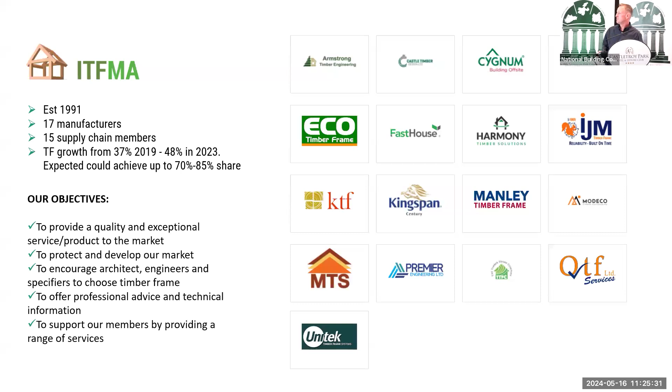As the trade association, we work with the likes of NSAI in developing the standards and continuously improving Irish Standard 440. We work with the Department of Housing, generating technical guidance documents. We have our own Part B supplementary guidance document for fire, and we're currently developing a second one for 1 hour assemblies that'll get us into more use in apartments and duplexes, etc. That'll come out later this year.

We're carrying out fire testing as we speak, and we're also developing a timber frame erector scheme, where we have around 280 erectors registered now, and they actually have to carry out examination online to be approved. It's still very much in the development stages, and we're trying to see how we can enforce it at the moment. That's where the struggle is.

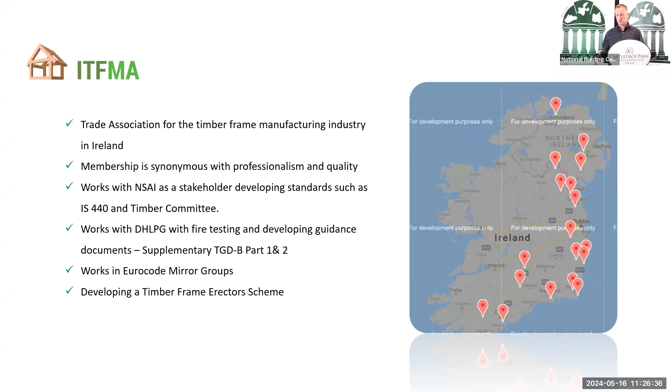So why is timber frame increasing in popularity? It's the same benefits as any offsite construction. Really, we are selling reduced build times, a much faster build, so reduced prelims. Overall program costs are down. You get more predictability in your program, in your costs, and then very importantly, reduced labour on site with shortages of skilled labour.

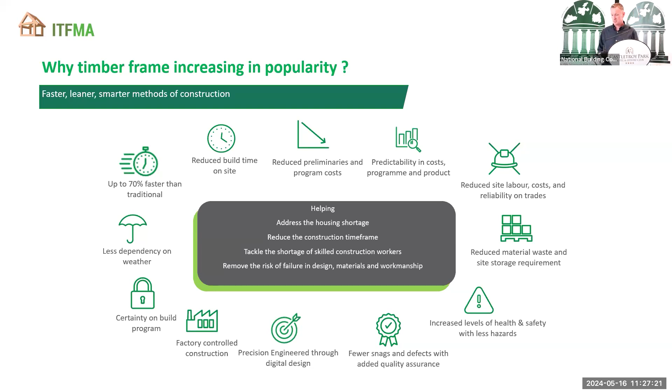More and more off-site construction has been used. It's precision engineered in a factory controlled environment, so we're less dependent on weather. We're starting the construction process in a factory while site work is getting started, and that's where the speed comes in.

I know I'm here to talk about IS 440, but I take every opportunity to mention that timber is the most sustainable way to be building. We have to talk about carbon capture and storage, because we have government targets now that we're trying to meet. So just a brief overview.

Forests and trees capture carbon from the atmosphere, producing oxygen through photosynthesis. Every 60 to 80 years, we harvest those trees, and then sustainably manage the forest, so we're actually growing more than we harvest. You're creating a new carbon sink every time you're planting new trees, which are fast growing, so we're absorbing more carbon dioxide. When we cut these trees down, 50% of the dry weight of that timber is still carbon, and that carbon is stored in it for the life of the timber.

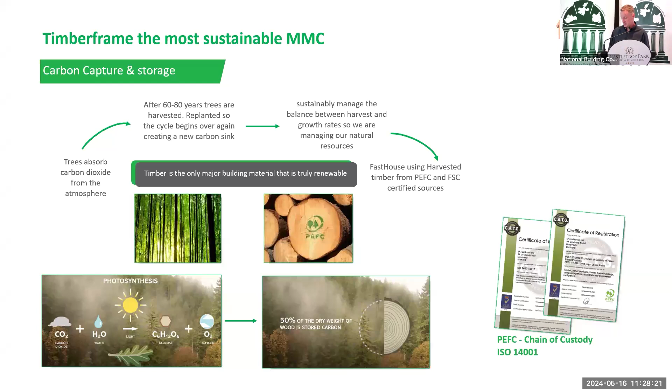If we put the timber into buildings that can last another 100 years or so, you're storing the carbon for the life of the building. So that's the real idea behind it.

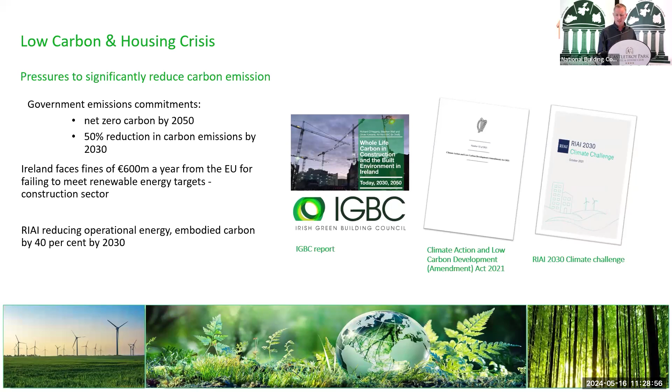As it stands, we are trying to get net zero by 2050, reducing carbon emissions by 50% by 2030. But if we look at the actual government targets to build 400,000 houses by 2030, the Irish Green Building Council's research has shown we're going to increase our emissions by 5 times, not reduce them. So we'll probably continue to fail on these energy targets. We're purely looking at operational carbon, but embodied carbon is the next stage to look at, and that's where timber comes in.

So I'll move on to timber systems. There are various types. You see modular, which we call 3D volumetric in the industry. You've panelized, which is a post and beam construction, 2D. CLT would come under that, and then you've panelized 2D, which is a platform type construction, which is your traditional timber frame that we're talking about.

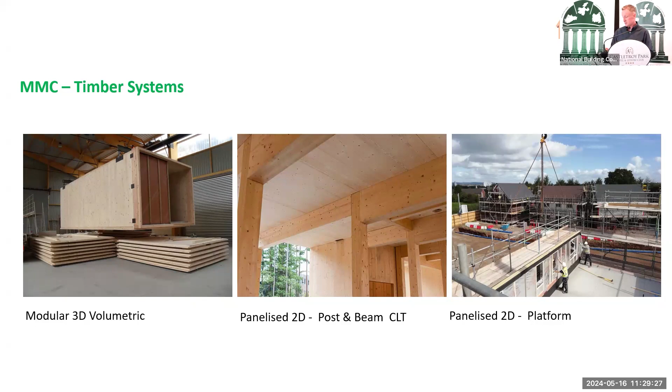So it's not a modern method of construction, everyone throws it in the same category, but it's been around a long time, although it has developed. It had a lot of problems in the early days. We've been building timber frames since after the war era. In the 50s, timber frame started to get built, then we moved on to the 70s, where there was a boom and a new generation of timber frame being built. It has developed quite a lot over time.

There's still evidence of houses built from the war era still standing, so it's definitely not a modern method of construction.

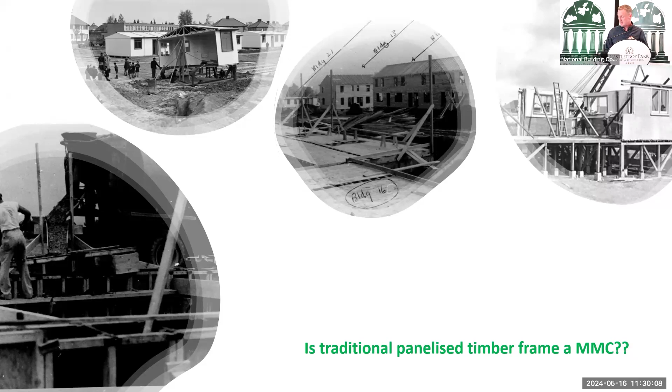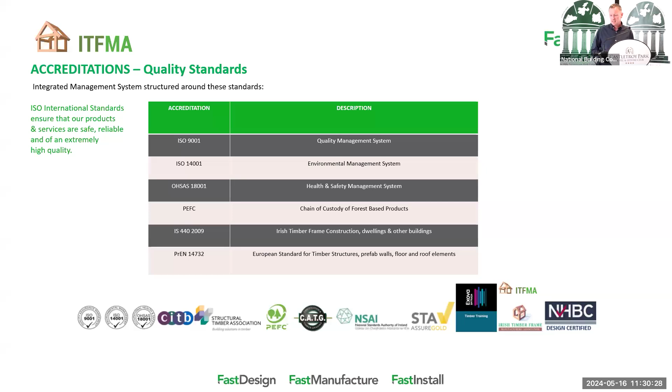There's various quality standards. I just threw up what Fasthouse have, but the ISO international standards, if you have an integrated management system based on those, you're ticking a lot of the boxes for quality management, environmental management systems, health and safety, etc. The key one we're here to talk about today is the Irish standard IS 440.

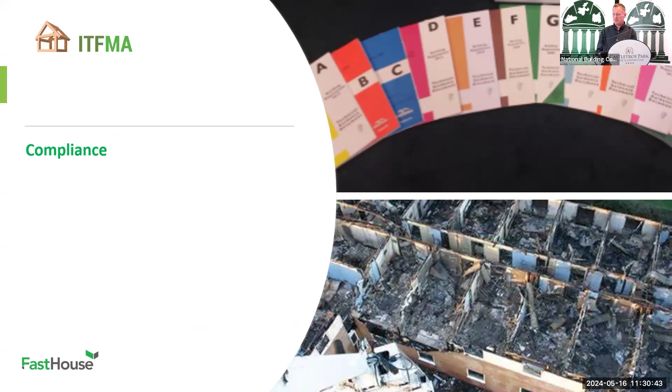So any modern method of construction, you're trying to show compliance to legislation, trying to prove that you can comply with the 12 parts of our building regulations. One of the easiest ways of doing that, you can either use prima facie guidance to give sufficient evidence by following the technical guidance document, or you can have your own national technical specification standard, which timber frame has. A lot of the other modern methods of construction are trying to show alternative methods of compliance.

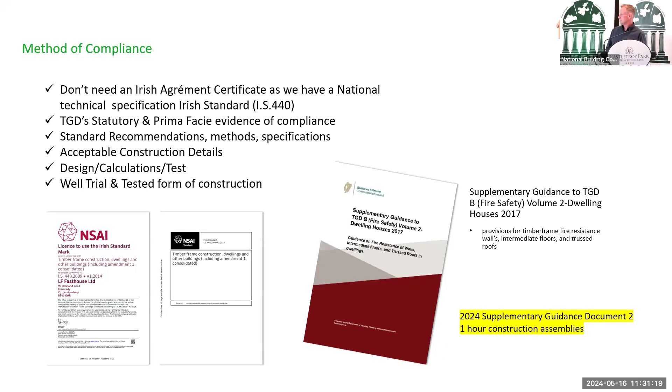We basically have all the accepted construction details. It's fully tested, a well trialled and tested form of construction. As I mentioned, we have a supplementary guidance document for fire, and we have another one coming out for one hour construction. So it's quite a bit advanced.

One thing worth noting is it's not just dwellings, it does cover other buildings, and it covers on-site and off-site. If you're following IS 440, you could effectively build a timber frame on-site. If you're not following IS 440, or cannot demonstrate that you're following IS 440 and have an NSAI certificate, then you're into an alternative approach.

The 2024 amendment is worth mentioning. We have that coming out later in the year, which is probably looking more at different wall build-ups being introduced, different external cladding options. So it's just developing it that bit further.

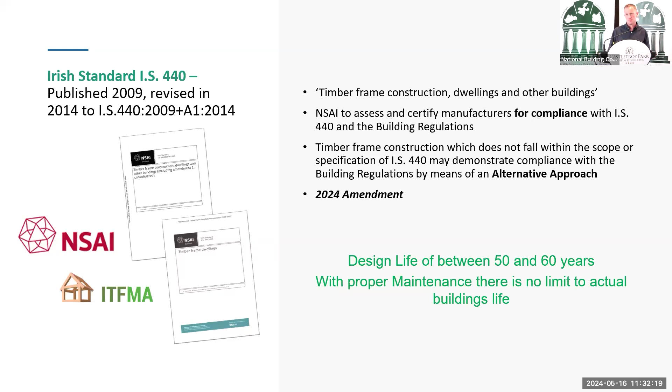As I mentioned, design life is 50 to 60 years, but with proper maintenance there's no limit on an actual building. If you maintain the cladding on the outside, timber frame can last indefinitely.

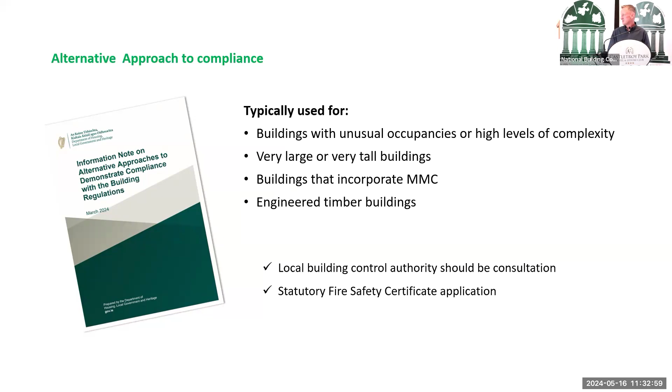So failing to have a national standard, the alternative approach method then - a good document released in March 2024 explains it quite well. Basically, if you don't have sufficient evidence, you're not following the technical guidance document, you're falling outside it, so then you have to use alternative methods. If you're going down that route, you need to contact local building control very early on in the consultation process, and your fire cert application and stuff needs to go in very early, so there's a bit more involved in it.

There's what they call alternative standards - you can use other approvals from other jurisdictions. There's a bit of confusion around this. We've found, especially when it comes to external claddings, confusion over what we can and can't use. I suppose the confusion is people look at Technical Guidance Document D, look at the harmonised standards and European technical assessments, and say, well, hold on, it clearly states you can have an Irish standard, an Irish agrément cert, or

an alternative national approval specification, or any state which is part of the European Economic Area. So the harmonised conditions are for marketing construction products. However, each member state has its own national legislation you still have to comply with. So you could have a German standard, say, for a building system, but you still then have to go through the 12 parts and prove compliance. You just can't come up with an ETA and say, well, this is fit for purpose in Ireland. So that's where a bit of confusion is.

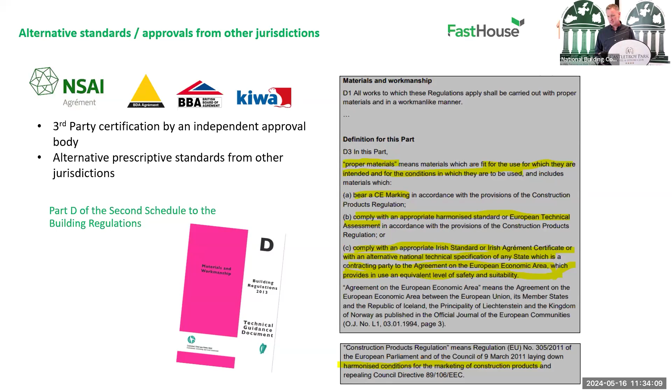So I suppose where we're going with this is you can have the NSAI Irish standard that shows you have complied with the 12 parts of the Irish regulations. What others are doing now is they're getting an alternative third party to do a verification process, and it'll mention in the certification that they have actually assessed it to demonstrate compliance with the building standards here in Ireland. My understanding is once you have this within your agrément cert, it should be fit for purpose.

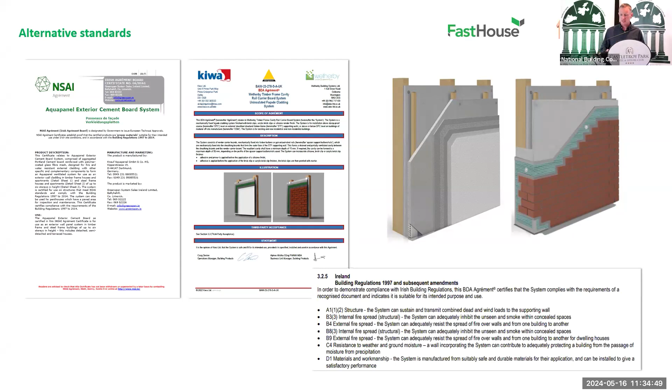So just to give an idea, but I suppose we don't have to worry about alternative approaches - timber frame in Ireland is covered under an Irish standard. The scope of the standard: 4 stories, maximum height of 10 metres to top floor, maximum fire resistance 60 minutes.

Key is a drained and ventilated cavity. That's not limiting us to any particular exterior cladding - some people believe it only covers masonry outer leaf. Once we maintain a ventilated cavity, you could effectively put anything on the outside once it carries its own approval or own certification.

So it's excluded from the scope of IS 440 what you actually clad the outside of your building with. Roof coverings, external envelope on the outside is not covered within the standard. Once you have a drained ventilated cavity, you could effectively put anything on it.

So it covers panels manufactured using mechanical fasteners. That's key, so you can't basically use a SIPS panel. You can't bond timber to an insulation core. You couldn't have cross-laminated timber where you have different lamellas cross-bonded. It's actually mechanically fixed, so it's your typical stud wall type construction, maximum stud center 610 mil, and it does include the interfaces with the external envelope.

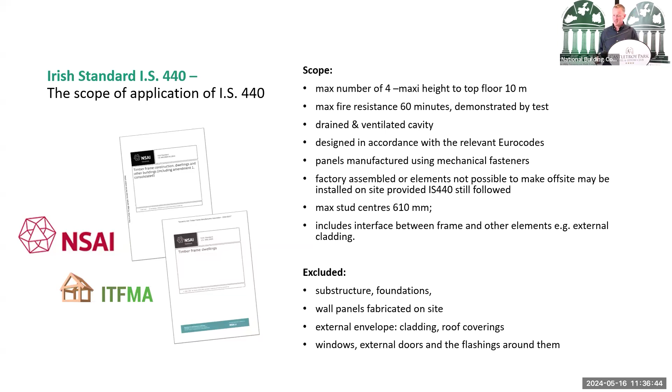So it doesn't include the actual whatever you put on the outside, but we do have to cover the interfaces with the timber frame. Excluded from IS 440: substructures, foundations, your wall panels fabricated on site. Well, you can fabricate, if you're fabricating to the IS 440, you could stick build a house on site in theory, but it's not going to be done in this day and age.

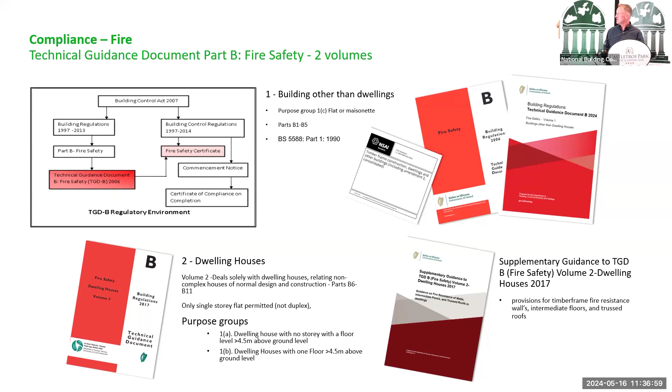So I just adapted a fire presentation I'd done previously, so I will not go into depth in this. It goes on and on. I'll fly through quickly - it's more to demonstrate the level of detailing that the timber frame industry in Ireland has.

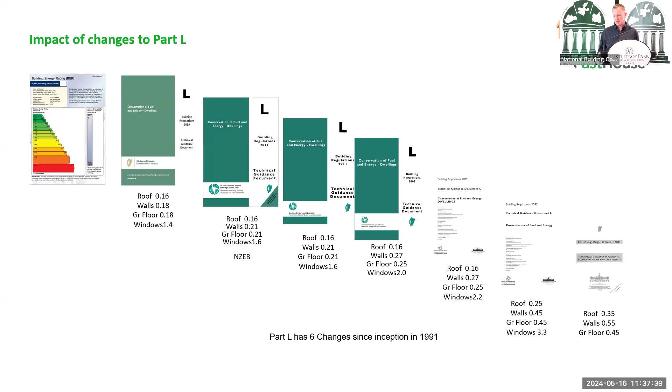I suppose what's happened is the impact changes of Part L. As Part L starts bringing down - if you look at walls from 1991, 0.55 U values, and we're down to 0.18 - what's happening is we were trying to make more energy efficient buildings all the time. We were encouraged to put more and more insulation into the walls, and as a result that became more and more plastic foam materials going in, and effectively we were just worried about heat loss. And also then you have to look at what impact does that have on fire and other details. So that's what brought about the supplementary guidance document B.

We've effectively narrowed it down to 4 wall types. So you have wall type 1, which is probably the most standard product you'll see - it's PIR continuous to the inside the stud, wool material in between the studs. Type 2 is what we're promoting more and more, which is basically a wool only panel, again you have your service void on the inside. And then type 3 would be PIR between the studs, and wall type 4 is PIR between and continuous on the inside the studs.

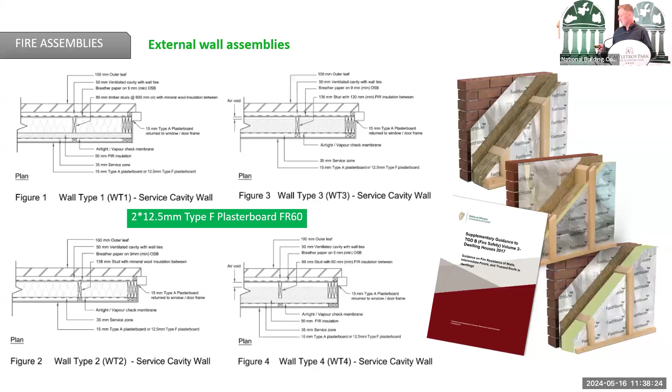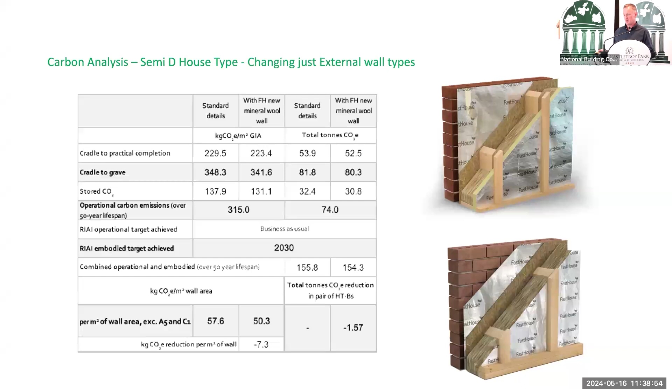So effectively we're trying to move away - the more embodied carbon calculations and carbon analysis we start carrying out, the more we want to actually omit PIR out of the wall types. So we're going for a wool only wall, which also has the additional benefit of a non-combustible solution. We've done analysis proving about 1.5 tonne of carbon can be removed from a pair of semi-Ds by actually just taking out that PIR from the external wall envelope. And then there's, as I mentioned, the additional benefit of fire and smoke by removing it out.

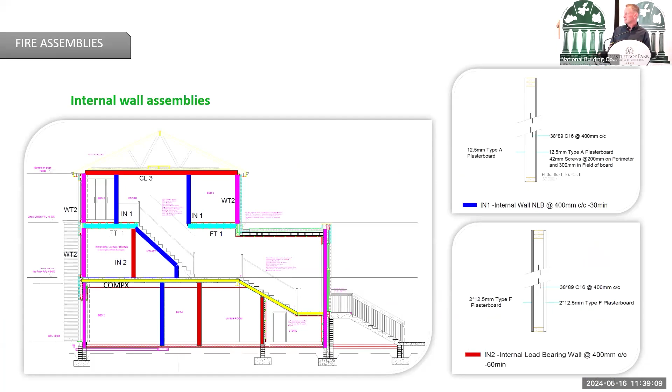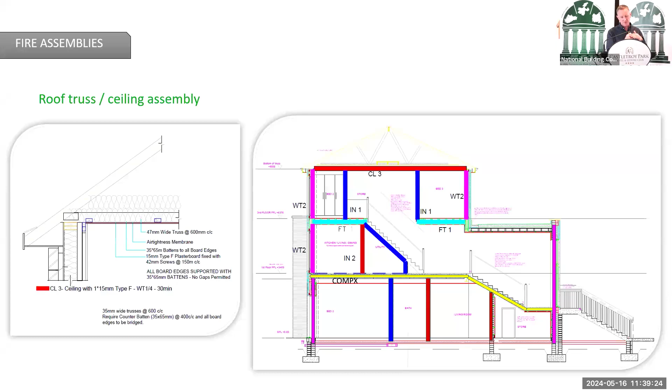So I'll fly through these really quickly to just show the level of testing that's been done on internal wall assemblies. There's various roof truss assemblies, so depending on the thickness of the truss chord, the centres it's at, depending on whether you're cross battening below to create a service void or you're direct fixing plasterboard, there's a full suite of tested solutions out there. The party wall detail is fully tested, so it's a twin leaf party wall.

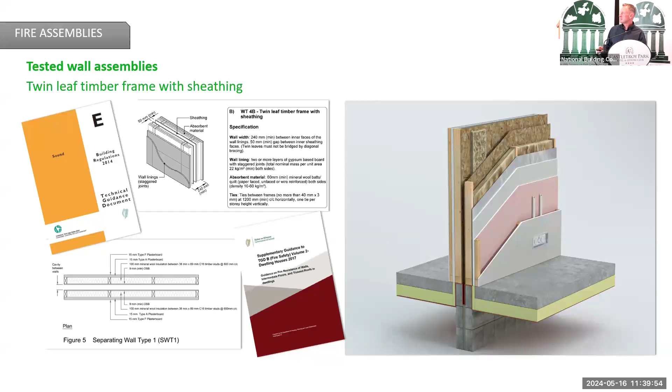Part of IS 440 is you have to manufacture it off-site in the factory controlled environment. That includes the full dry lining of it, so you have to put on the plasterboard in the factory. We wrap it then with a protective membrane coming to site to protect it from moisture damage, and that'll be the standard wall type now.

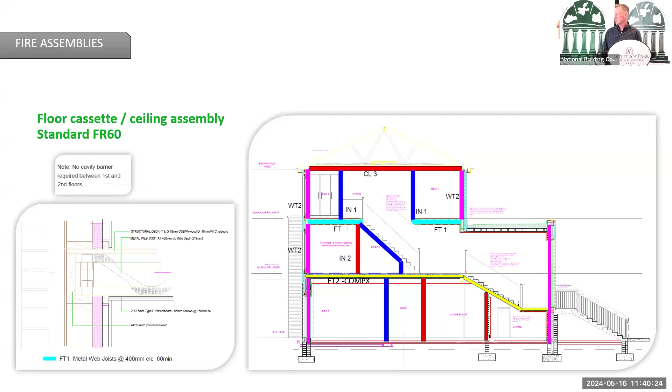And we're just going into floor cassette assemblies. So posi joist floors are by far the most common in your typical dwelling, because of that open web to allow ventilation units and services penetrate through freely. We've tested now various posi floor joists to try and use them for a 1 hour compartment floor - they're ongoing at the moment, those tests. That's your typical floor cassette that can be used in compartment at the moment.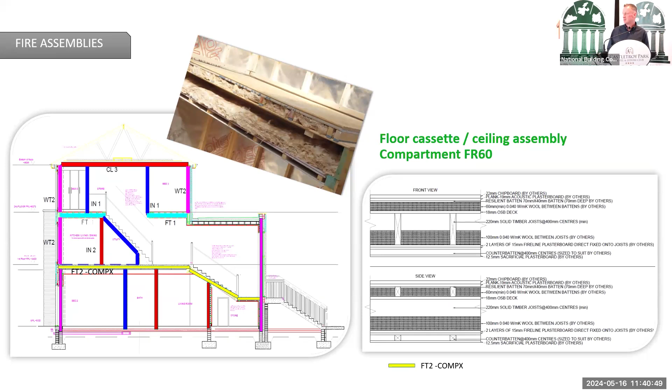That's fully compliant with the technical guidance document, so without having to rely on test evidence, you can just use this build up, and at part E and part B it's within the guidance document. It's a solid joist floor - it's not ideal because it's very labor intensive on site, there's quite a bit of layers to it.

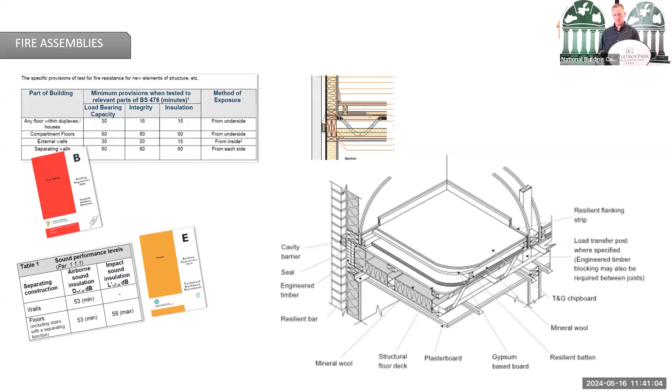Part E and B, and then this is where we're going with it - trying to get the posi floor has had acoustic tests and stuff done, but that'll be hopefully part of the next supplementary guidance document, so it's within prima facie compliance. I'll fly through these.

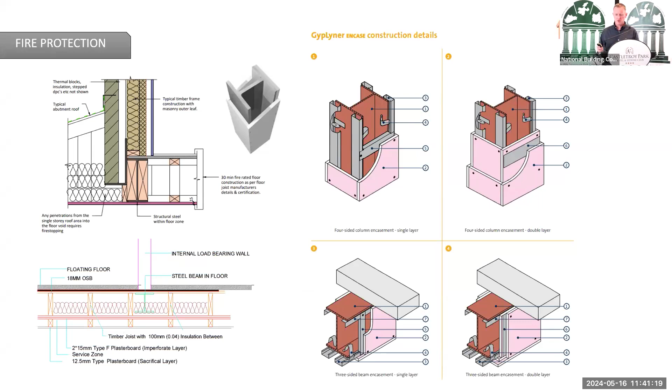This is just more to demonstrate that we have a wide suite of approved details, all tested, just showing different fire protection of encasements. And there's fire treatment around socket boxes, etc. It's all fully trialed and tested.

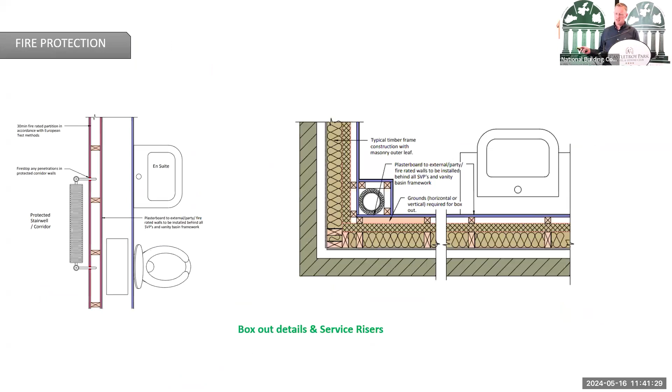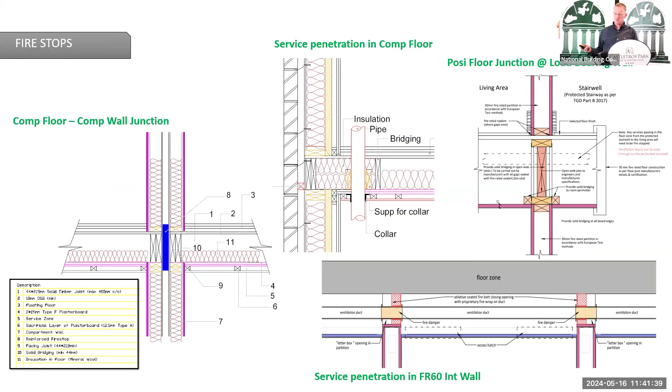That's just showing the boxing out details for service risers. Then if you've penetrations going through a separating floor or above a separating wall, there's various penetration details, ventilation ducts and so on. I could spend a separate presentation just on fire stopping details.

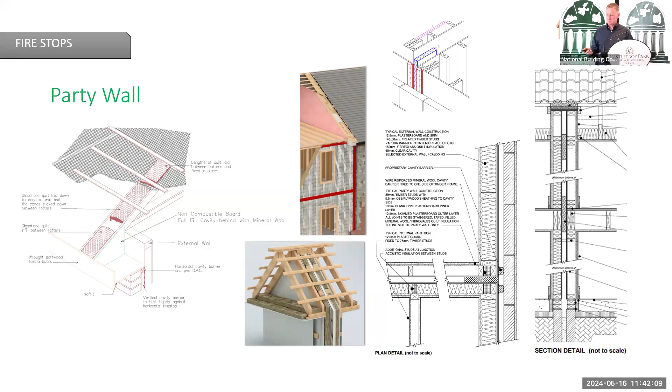The party wall is an important one. The timber frame manufacturer is fully responsible for doing all the fire stopping that goes up over the eaves level. There's a lot of detail in the soffit boxes, non-combustible boards, and in the cavity void between them, but they're fully responsible for all that on site.

The installer and manufacturer is fully responsible as well for all the fire stop locations. So you can see typically where your cavity barriers are, around your opes, up over the eaves, at the corners. They're typically the red fire socks that are installed. A timber 38mm is sufficient, believe it or not, but to allow for variation in cavity, everyone's using the insulated socks really now.

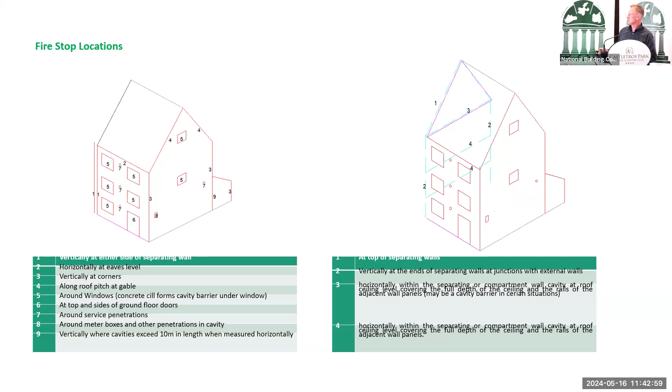Then you have the fire stopping around the party wall, going horizontal at junctions with party floors, and again where the party wall meets the external wall. All of this comes under the timber frame manufacturer's responsibility with IS 440. That's a typical drawn elevation we'd give out on any project to show the installers where everything has to go.

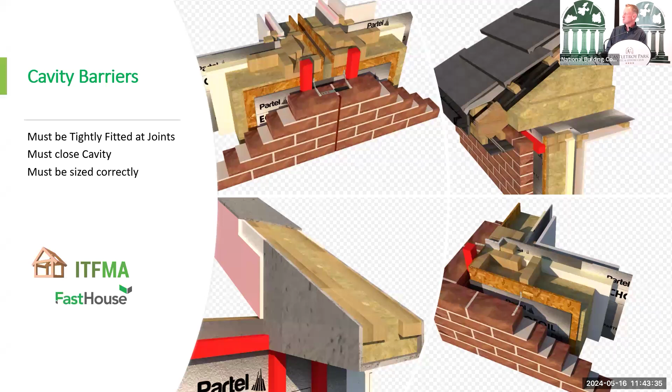Must be tightly fitted at joints. That's important. Sometimes you go to site and you can see one cavity barrier stopping, the next one stopping, and you can nearly put your fist through it. You can see where the cavity's gone too wide, so it's an area that must be closely monitored and sized correctly.

Most of the presentation was about fire, so I only realised yesterday that the discussion today was about Technical Guidance Document C. So I've thrown in a few slides about how we deal with resistance to moisture.

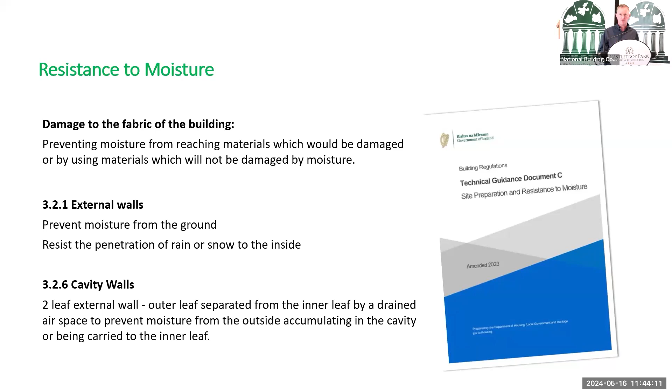We have to prevent moisture entering the building, from the ground up and from the outside, with the outer leaf separated from the inner leaf, which we have in IS 440. It's a drainage cavity. Similar to the fire problem with Part L, as we improve energy efficiency and talk about zero energy buildings and A1 rated buildings, the more airtight we're making buildings. Airtightness is great for energy performance, but it's also creating other concerns when it comes to moisture resistance.

Years ago, we used to put a full vapor barrier on the inside of timber frames, and that was trapping moisture in the frame. It wasn't allowed to fully breathe through. Things have changed. There are much cleverer ways you can prevent heat loss by having good airtightness, but a healthy home needs to fully breathe as well. It's the use of very intelligent membranes nowadays that's allowing us to mitigate against condensation risk while also giving good airtightness.

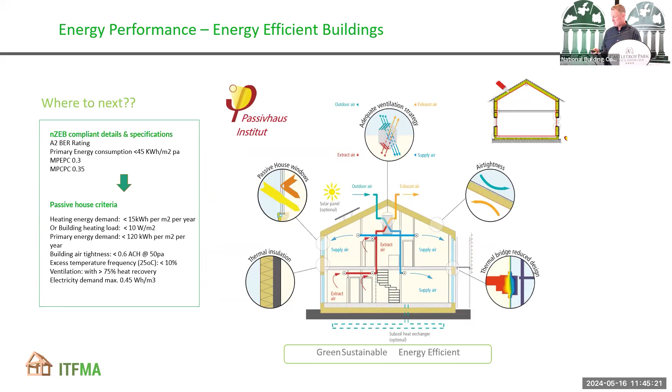So vapor barriers, as I said, is what we used to use. That caused timber frames to sweat. Any moisture built up in the wall wasn't allowed to escape. Breather membranes are used on the outside of the building. Typically we use Partel, which is a good way of doing it. They use blue text for the outer breather membrane and red text for the internal membrane.

So then you know which is the VCL, you can't mix them up. And you'll notice they're all foil faced. Nowadays that's key to energy efficiency as well. That reflective foil is radiating the heat back into the service void, and also in the external cavity it's radiating back into the external cavity, giving good thermal resistance in the air voids.

The vapor diffusion is what it's all about. We want to manage water at different times of the year, and we want to allow the wall to fully breathe. If we just use a vapor barrier, all that condensation would condensate onto the inside of the wall and cause problems.

Impermeable. There's different types of foil. There's intelligent type solutions with the foil, and it's all to do with these pin type holes and the molecules of water and vapor. I believe water is a bigger molecule, so it won't let the water through, but allows the warm, moist air and vapor through. So they're intelligent foils.

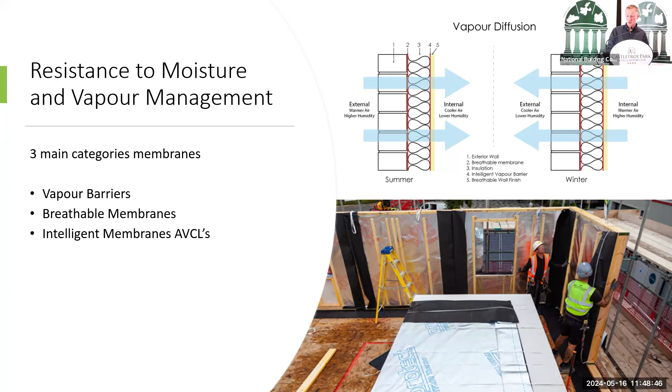I suppose the intelligent membranes are the best of both worlds. You're getting the airtight seal and you're still allowing that control of vapor, that passage of moisture through.

Then I suppose we look at the moisture content of the timber itself. Moisture content of timber is linked to the key properties of timber - the strength, the resistance, how it degrades, the durability of the timber over time is very much based on its moisture content.

So the structural grades are kiln dried timber. Typically we have to follow EN 13183, and it cannot exceed 18 degrees or 18% moisture content during the construction or fabrication stage in the factory. Now that moisture content does adapt based on its surroundings, so you just have to follow the standards, the 13183, when you're measuring moisture content of timber, but it's a key factor. Once it's leaving the factory, it's wrapped in all these membranes that are allowing it to breathe anyway, so it is a key element.

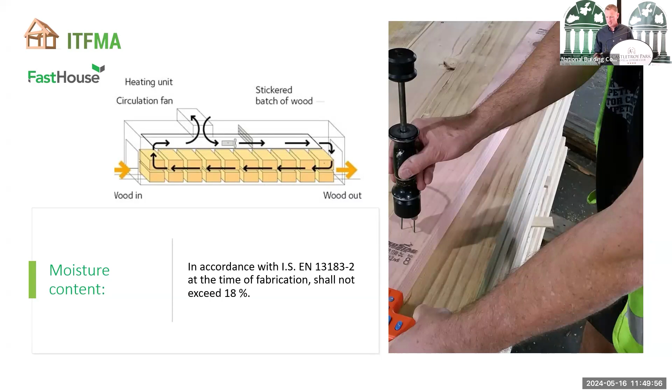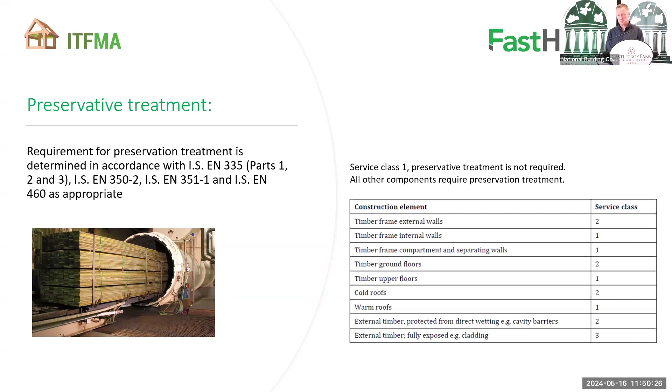And then preservative treatment - there are requirements based on its service class. If it falls within service class 1, it does not require treatment. So that'd be your internal walls, your compartment or separating wall buildup, the upper floors, and in a warm roof environment. Everywhere else you do need to treat the timber to the relevant standards. So again, that's an important aspect of moisture control.

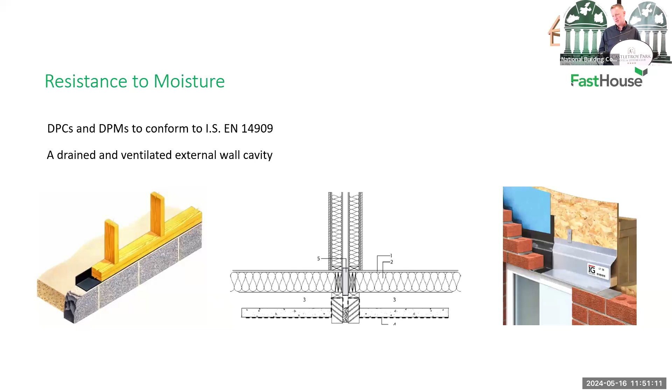And then we have our DPCs and DPMs. These are used as per your traditional building really - the bottom, the sides of all your windows, your window sills, around the window sills, the lintel areas. But every sole plate, so the base plate of every wall, ground storey wall, will have a DPC factory fitted to it. The party wall detail has a drainage cavity produced below, and your DPCs are underneath there as well. They're all lapped with your radon, your DPM. So it's more or less similar to standard detail, standard construction.

And then resistance to moisture, condensation risk analysis is very important. When you're getting U-value calcs done for a particular build-up, it's good to do the interstitial condensation risk analysis on the different build-ups. We also thermal model all our junctions, and on the thermal model you get a condensation risk analysis done as well for your FRSI value, which is the surface temperatures. If they fall underneath a certain temperature, that cold surface will have condensation risk. So you should be looking for all the junctions thermal modeled with that FRSI value, and for interstitial condensation risk analysis with U-value calcs, etc. It's another key part.

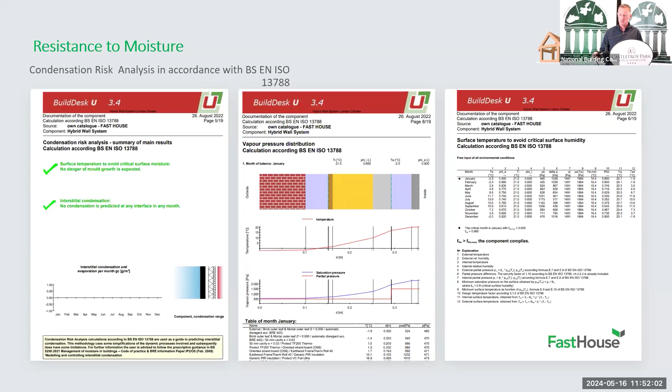And then I suppose quality assurance on site is key. We can have these wonderful standards and be audited for them, but if we're not doing day-to-day management on site - as I said, ITFMA have the approved erector scheme ongoing, we're trying to develop that - it's up to each manufacturer themselves to have stringent quality control. So we used to have a paper type of checklist where you'd have to walk around with the client and check every detail in IS 440.

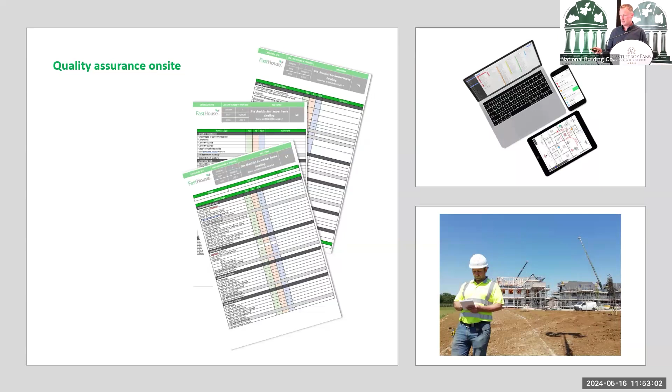Now it's all done with a Fieldwire software. Everything's done on a phone or a tablet. You photograph every critical junction. There's GPS coordinates to each detail for each house, and that links back nicely to BCAR. So the assigned certifier has a full backup of files of evidence, etc. So it's key, I suppose, to measurement.

No, there's not. I don't know what they're all using. We'd be Fieldwire, but there are other versions I wouldn't be familiar with. But thank you for listening.

I suppose the key takeaway is, the first thing you should be looking for is the manufacturer's NSAI certificate to prove that they're fully compliant with IS 440, because then they're getting audited, etc. And if they're a member of ITFMA, they usually are the upper tier of timber frame manufacturer as well. We're always trying to develop better quality control and standards moving forward. So thank you for your time.